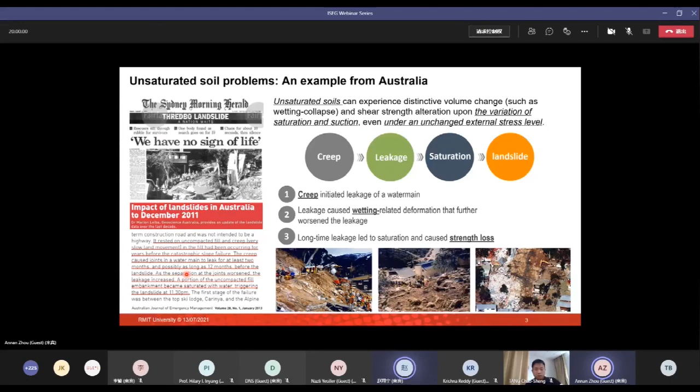Like the Thredbo landslide, unsaturated soil is blamed for many geotechnical and geoenvironmental damages and failures, like cracking in pavements, building tilting, damage of retaining walls, failure of GCL systems, and a huge number of slope failures. As we know, the main focus of soil mechanics in the last century was on saturated soil.

Most of the soil mechanical principles were developed for saturated soil as well. However, the variation of soil moisture due to environment and human activities is actually inevitable, and most shallow foundations and buried infrastructure systems are in the unsaturated zone. So they are impacted by soil movement and stress change related to wetting and drying.

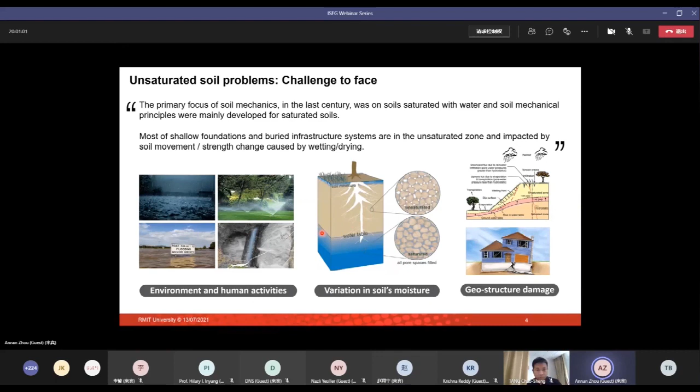So our research is focusing on unsaturated soil behavior at different scales. This presentation will cover 3 parts. In part 1, we will talk about constitutive modeling at the soil element level, which is regarded as the fundamental of unsaturated soil mechanics. In part 2, we will scale up to the engineering level and cover some aspects of numerical modeling.

For example, the footing behavior with a leaking pipe. And in part 3, we will scale down to the particles, where we will talk about micromechanical modeling of unsaturated soil at the particle level.

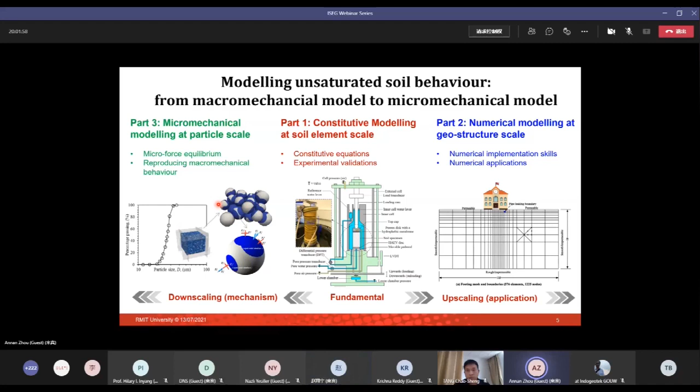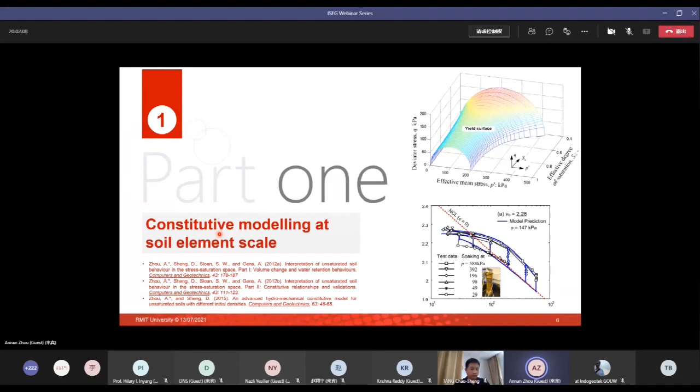Now let's start with part 1, the constitutive modeling at soil element level. Following the pioneering work done by Alonso and his colleagues in 1990, it is very popular to employ suction as a second constitutive variable in addition to the net stress or effective stress.

In general, these models assume the compression modulus, lambda S, of unsaturated soil as a function of suction. So compression modulus is usually involved in the hardening law for most of the elastoplasticity models. Therefore, these models can be classified as a category called suction hardening models.

We acknowledge different models may use different assumptions. We can see here two most popular options. For example, some models adopt compression modulus increasing with suction, but others adopt just the opposite, decreasing with suction. As long as suction is employed as a second constitutive variable and controls the hardening process, these can be viewed as still within the stress-suction framework.

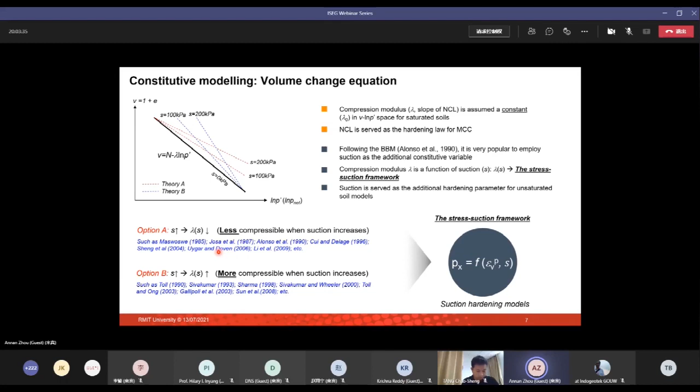The stress-suction framework, or the suction hardening models, achieved great success in unsaturated soil modeling, in particular in interpreting and modeling loading collapse behavior, but they still have some limitations. For example, in general they have the common problem in modeling a nonlinear compression curve at constant suctions and nonlinear collapse volume change at constant suctions.

So no matter either option A or option B you adopt, these two limitations exist. So we believe that suction, in the end, is a stress variable which may not be suitable to be served as a state variable as well.

Therefore, we assume the hardening of unsaturated soil is more related to the degree of saturation, or let's say the effective degree of saturation, which is a function of degree of saturation, SE. So we assume the compression modulus is a function of effective degree of saturation rather than suction.

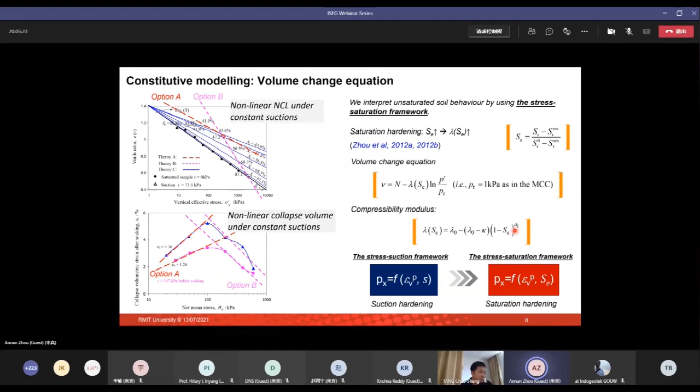So if we calculate the full derivative of the volume change equation, we can see the degree of saturation affects the volume change in two aspects. On one hand, SE affects the volume change by changing the compression modulus, and on the other hand, SE affects the volume change by changing the bonding capacity of the meniscus.

Here is the experimental validation of the volume change equation we propose. At constant suctions of 100, 200, and 300 kilopascal, we can mimic the nonlinear compression curve using the proposed model. This figure shows the comparison between the predicted specific volume and measured specific volume, which matches very well.

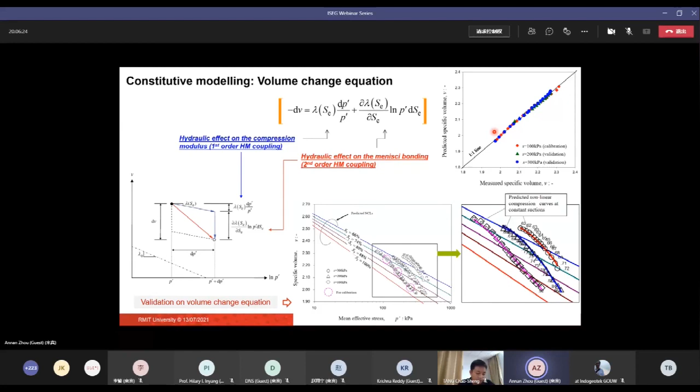If we look into this volume change equation again, we can find the effective degree of saturation, SE, plays a very important role. First, it constructs the Bishop's effective stress, so it is a component of the Bishop's effective stress. It also serves as a state variable, and it is adopted as a hardening parameter as well.

However, the effective degree of saturation itself is not a directly controllable variable. It is challenging to determine it from controllable variables like suction or net stress. To solve this problem, we proposed an enhanced water retention equation which can consider nonlinear hysteresis for cyclical drying and wetting.

Considering the nonlinear hysteresis, we involve a new parameter B here, which is related to the liquid-solid contact angle. This enhanced water retention equation can also consider the mechanical shift of the water retention curve at constant suction. To consider the mechanical shift, we introduce the second coupling parameter A2, which is able to couple the mechanical component volume change, volumetric strain, with the degree of saturation.

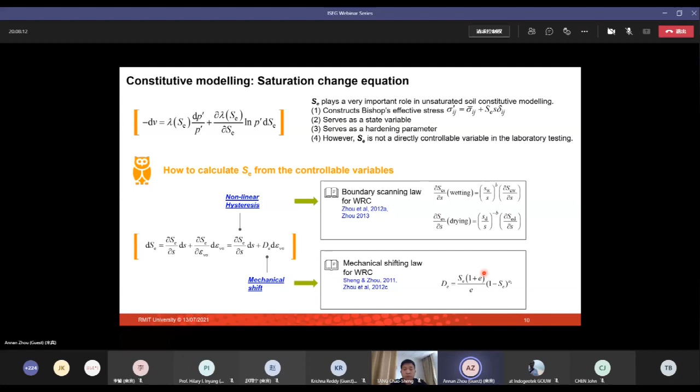Due to the time limit, I'll skip all the details about this enhancement and just show you the modeling results. These top two figures show the scanning drying and scanning wetting data and the modeled results, and the bottom two show the cyclical drying, wetting, and the prediction.

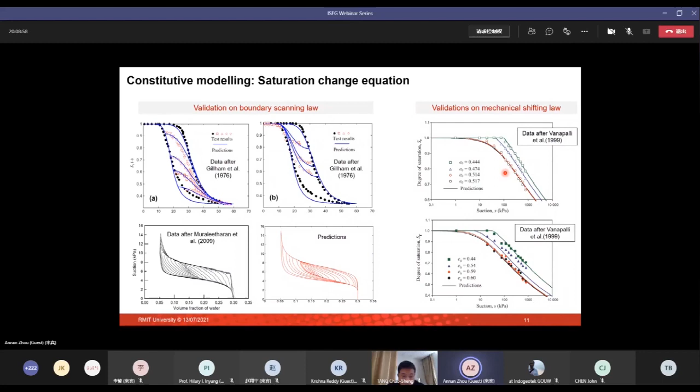We can see the comparison shows the model is able to mimic the nonlinear hysteresis of the water retention curve. The right two figures show the observed mechanical shift of the water retention curve and our prediction. We can see that with the decrease of the void ratio, the water retention curve is shifting upwards, and the prediction matches the experimental results very well.

Once we have the volume change equation and the saturation change equation, we can build up the full constitutive model following the modified Cam-Clay model or the Barcelona Basic Model. So we can derive the loading collapse surface, the yield surface for the unsaturated soil. This figure shows the yield surface for the unsaturated soil.

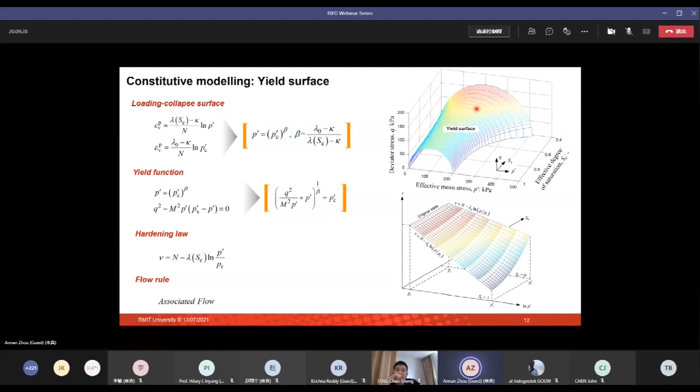This table shows the parameters we use for the constitutive model. We need 5 mechanical parameters, which are the same as MCC, and 5 hydraulic parameters like the Van Genuchten water retention curve, and 2 newly added coupling parameters, A1 and A2. A1 and A2 can be easily calibrated by one constant suction compression test like this.

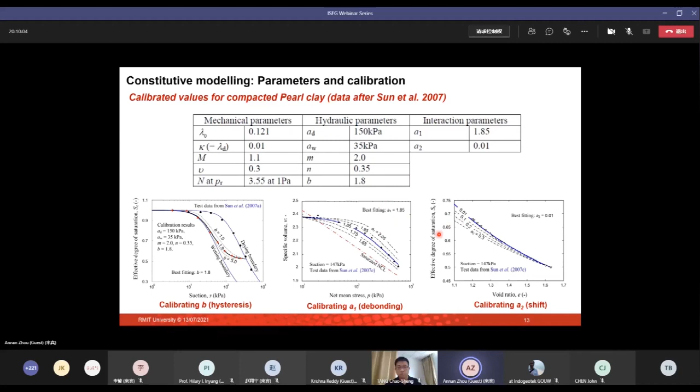Now let's see the model's capacity. These 4 figures show about 20 isotropic loading and soaking tests at different initial density and soaking pressure. The blue curves are model predictions, and the predictions and experimental results match each other very well, including the collapse segments. We can see here several collapse segments.

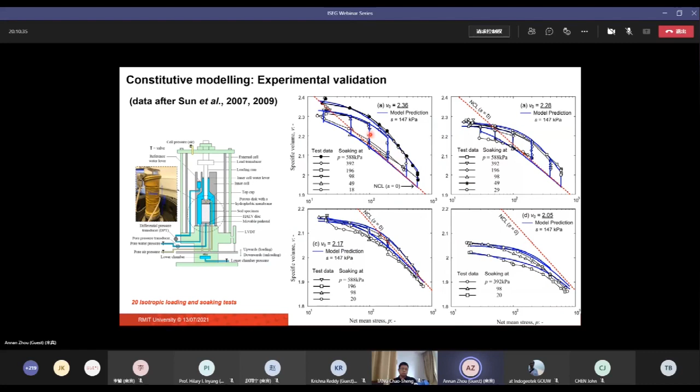These slides show 4 constant triaxial compression tests and predictions. For each test, suction and the degree of saturation are different. The top figures show the stress-strain relationship, the middle ones show the volume change, and the bottom one shows the saturation change. Again, we can see the model performs very well here.

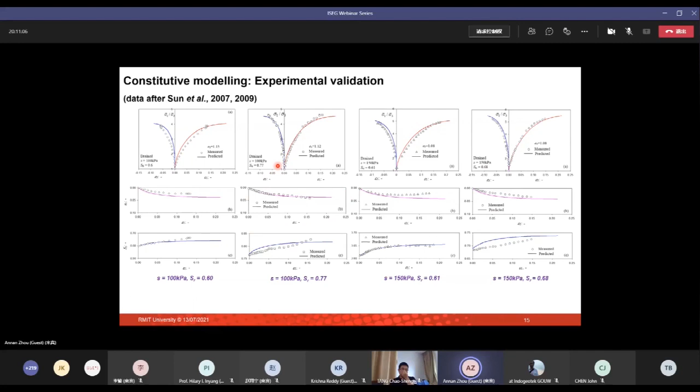As we mentioned previously, in part 2 we will scale up to the engineering level. In this part we will cover some aspects in numerical modeling of unsaturated soil problems, for example, the footing behavior with a leaking pipe.

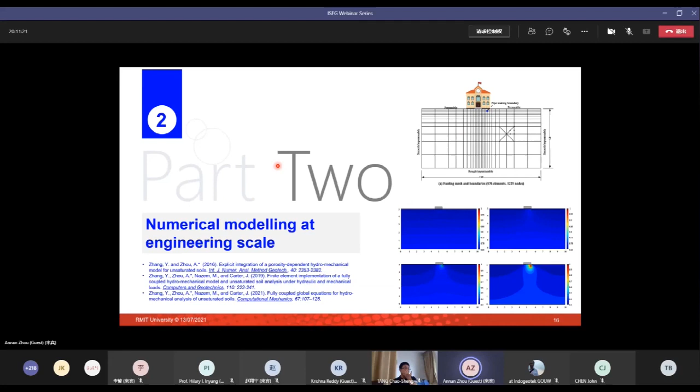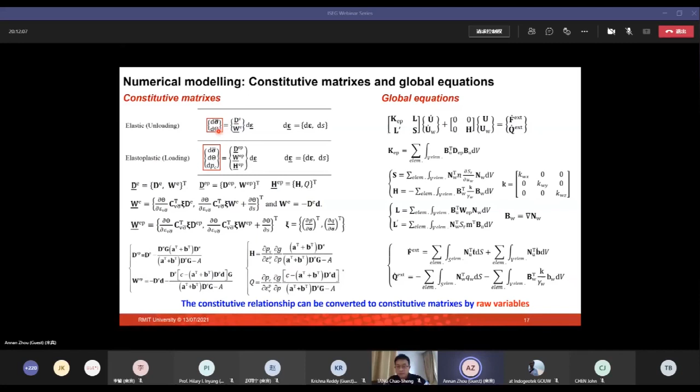Following the general way to build up the finite element program, we turn the proposed constitutive model into the constitutive matrix. One point I'd like to highlight here is, although we build up our model in terms of the Bishop's effective stress and the effective degree of saturation, the constitutive matrix for the elastic and elastoplastic responses can be finally represented using raw variables like total stress, strain, water content, and suction.

We use explicit integration for our model implementation. To ensure accuracy, we also involve the degree of saturation into explicit integration with automatic substepping control. We use this as a numerical example: a 20 increment with 734 automatic substeps.

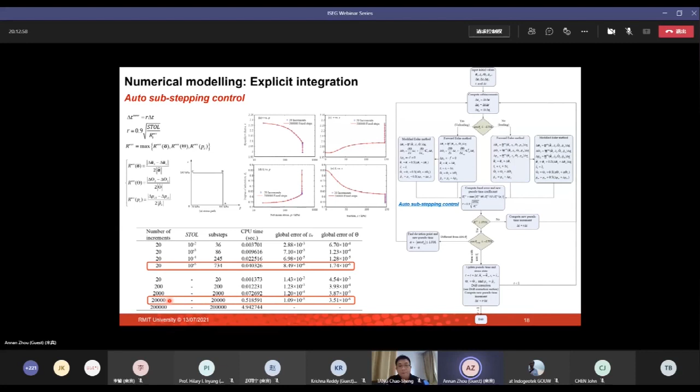This slide shows some validation examples for our finite element code. The left figure shows the sand column test result, and our prediction. Figure A shows the section control, the suction distribution change along with the depth with the time. Figure B shows the isotropic loading and wetting test result, showing the outflow rate with time.

This figure shows the isotropic loading and wetting test results and our simulations. The good performance confirms the capacity of the constitutive model as well as the numerical implementation methods.

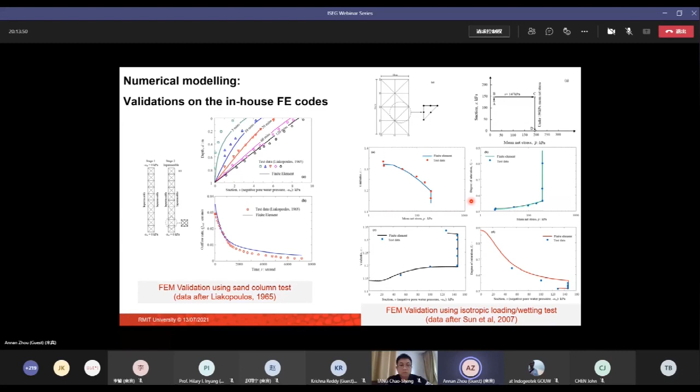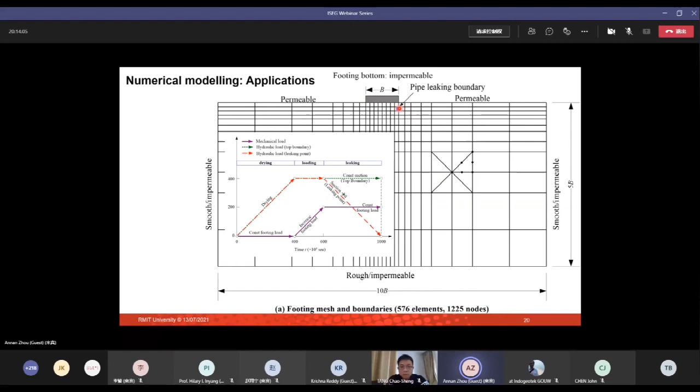This is a numerical example showing the footing performance with a leaking pipe. We can see this is a footing and this is a pipe with leakage. This figure shows the simulated suction profile change in the soil due to the pipe leaking.

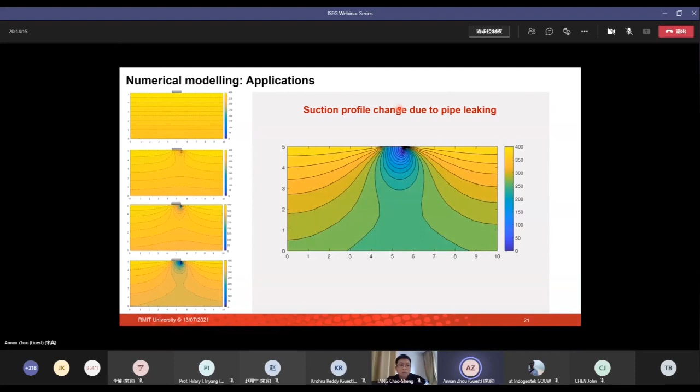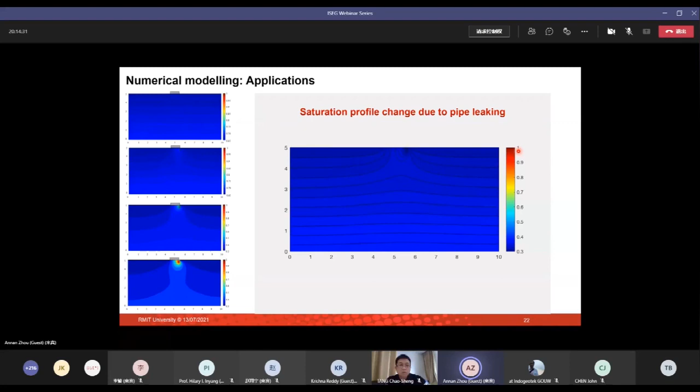This figure shows the simulated saturation profile change in the soil due to pipe leaking. We can see for the leaking point, the degree of saturation reaches 100% along with time.

This figure shows the simulated settlement of the footing due to the pipe leaking. We can see the curve here. For the near end to the leaking point, we observe wetting collapse. But for the far end of the footing, we observe swelling of the ground.

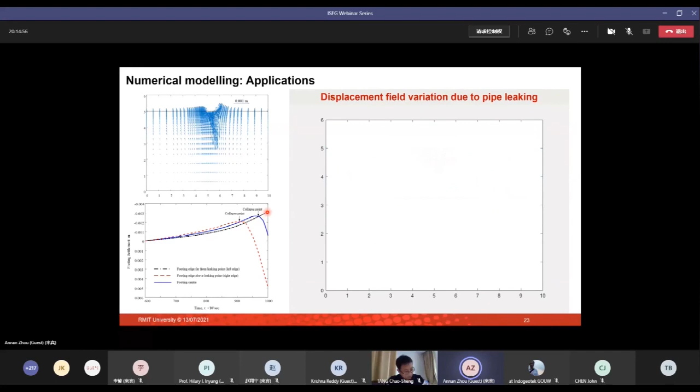Now let's move to part 3. In this part, we will scale down to the particles in unsaturated soil, and we will talk about the micromechanical modeling of unsaturated soil at particle scale.

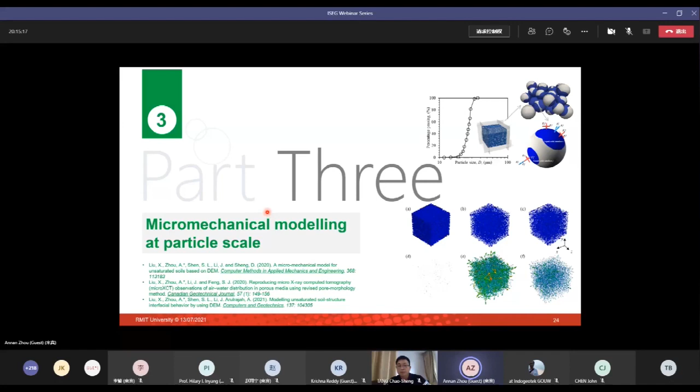It is clear that the micro forces acting on the particle caused by water are highly related to the liquid-solid interface. So therefore, the first step for the micromechanical modeling of unsaturated soil is to have a quick liquid-solid interface estimation that can be embedded into DEM.

We employ a simple method for quick liquid-solid interface estimation. For the overlapped caps, or clustered interface, we use the hemisphere approximation, which is a simplified Young-Laplace equation. For the isolated caps, we directly apply the Young-Laplace equation.

To achieve this, we also developed a simple way to judge the interface, which should be classified as overlapped caps and which should be classified as isolated caps. So like this.

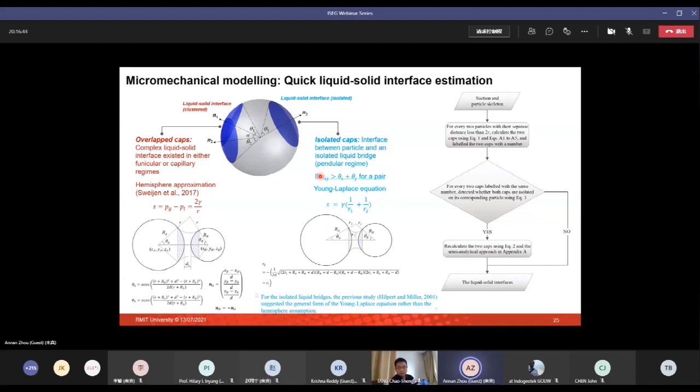Using 22 particles, we compare the simulated interface obtained by our quick estimation method and the pore morphology method for different suctions. The performance is not bad, but more importantly, the quick estimation method is much faster than the traditional pore morphology method, giving us the opportunity to include it in the DEM simulation.

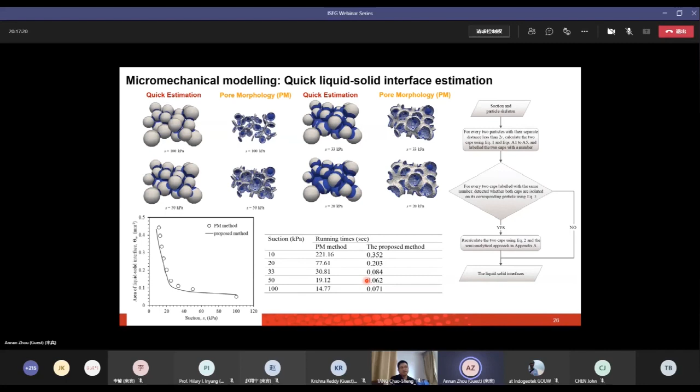Once we determine the liquid-solid interface for a particle, we are able to calculate the capillary forces. The capillary forces consist of two parts: the force determined by the liquid pressure Fs, and the force determined by the interfacial tension F gamma.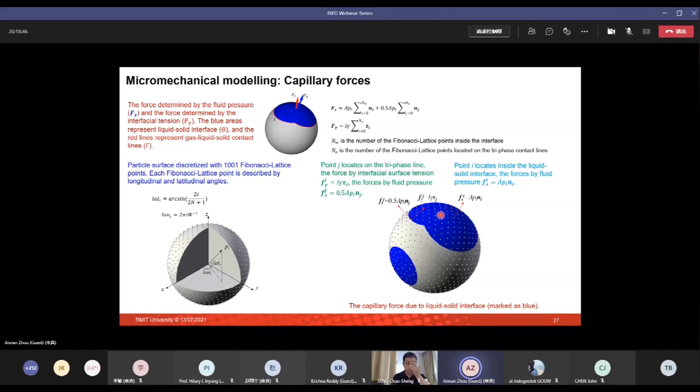So the total force acting on a particle consists of the contact normal force Fn, contact shear force F tau, liquid pressure force Fs, and the tensile force at the solid-gas-liquid line F gamma. Once we identify the total force for each particle, we can make use of the commercial DEM solver to find the equilibrium.

For each step of the equilibrium, we need to update the liquid-solid interface and the related forces. Even with the quick estimation method we proposed, it is still a very time-consuming process for this kind of simulation. So let's see the results.

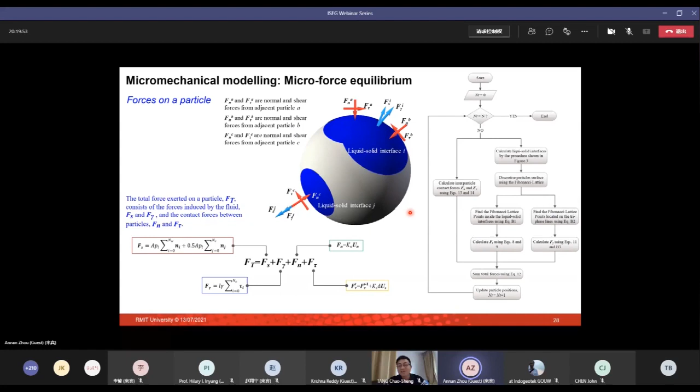We use a micromechanical model to simulate several desaturation tests and constant suction triaxial tests with different confining stress and different suctions. We used 9,977 particles for the simulation, with particle sizes ranging from 11.7 micrometers to 34.5 micrometers, in the range of silt.

We also calculate the effective stress parameter chi from our micromechanical model, which shows good match with the experimental results, better than the existing research from other pioneers. This comparison shows the capacity of our micromechanical model.

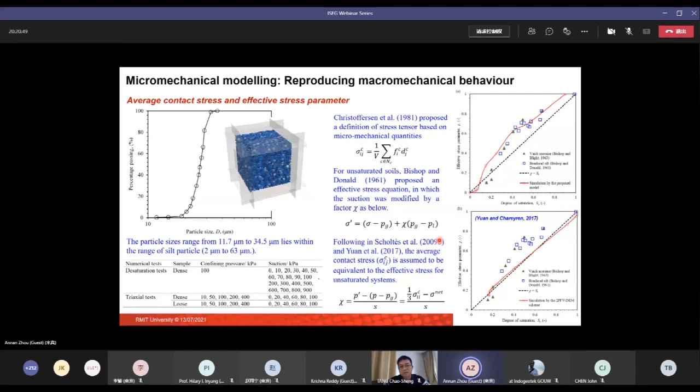So this figure shows the macroscopic stress-strain relation behavior produced by the micromechanical model for the loose and dense sample with different confining stress and suction. We can see the dense sample shows peak strength more distinct compared with the loose sample, and the sample with high confining stress shows a high strength.

More importantly, we can find the sample with 40 kilopascal suction shows the highest strength for all the groups. This is because at 40 kilopascal suction, the product of suction and the effective degree of saturation is the highest.

So we pick up the strengths, including the critical strengths and peak strengths for each stress-strain curve, and plot them together in the space of Q and average contact stress. They show very good linearity, which indicates the average contact stress may be a good option for building up the constitutive model.

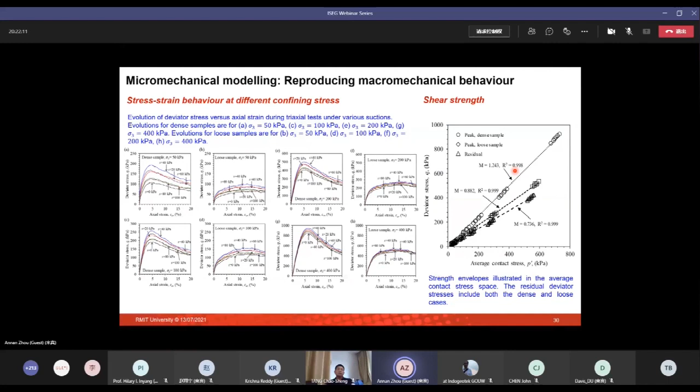This figure shows the liquid-solid interface distribution, capillary force distribution, and angular distribution during the shearing. The axial strain for this figure is 0, 2% which is the peak strength, and 20% which is the critical state. We can observe the capillary forces turn from isotropic distribution to anisotropic distribution during shearing.

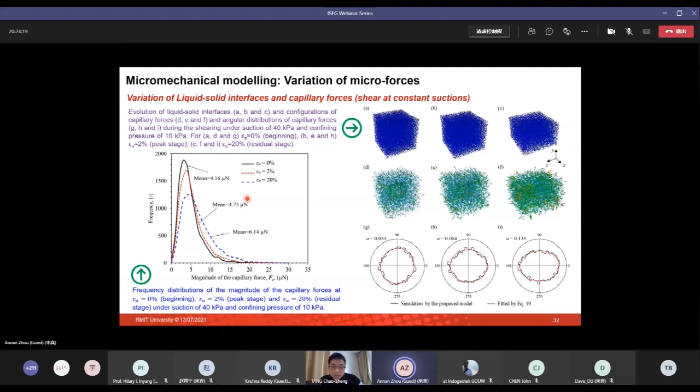This figure shows the variation of the contact force network for 0 suction. This is for 0 suction, and this is for 40 kilopascal suction. We can see the contact force.

You have 2 minutes. Yeah, that will be enough. This is the last slide.

We can see the contact force network at 40 kilopascal is much stronger than that at 0 suction. From the frequency and mean value plot, we can also identify that at the entire shearing stage, the mean contact force with 40 kilopascal suction is much higher than the mean contact force at the 0 suction. That's why we observe the stress-strain curve of 40 kilopascal suction is much higher than the others.

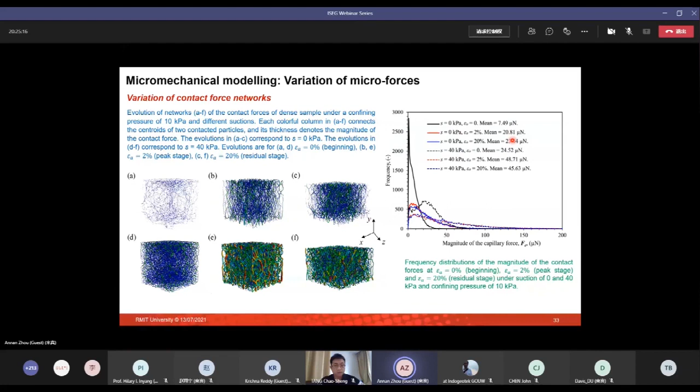Now let's move to some concluding remarks. Let's make it simple. First, the Bishop effective stress and the effective degree of saturation are adopted as the basic constitutive variables, and the hydraulic hysteresis and fully coupled hydromechanical interaction can be considered.

The current model is more suitable for silty soil. It is still very challenging to model clayey soil over a large suction range, and this framework cannot be used for unsaturated expansive soil either.

The constitutive model has been implemented into the finite element codes. The developed in-house finite element codes can be used for 1D, for example the soil column, and 2D, let's say the footing analysis.

But the current finite element approach is still hard to be applied to real case analysis, for example 3D multi-soil layers and natural environment conditions.

The micromechanical model has been built to bridge the micromechanical characteristics and the macromechanical observations. But due to a few assumptions, the comparison between the results from the micromechanical model and the macromechanical observation still remains a mechanism issue, so it is still hard to compare the results directly with the unsaturated soil test results.

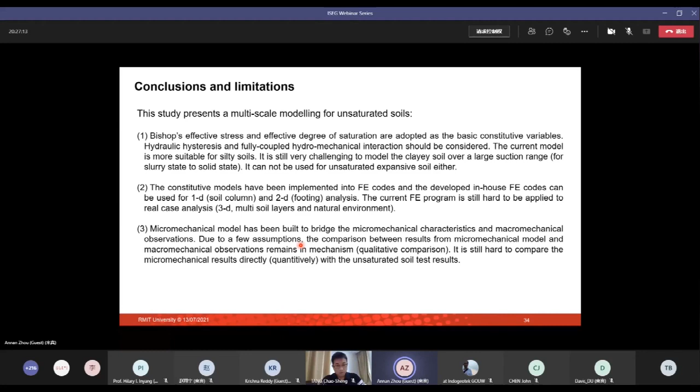All in all, in unsaturated soil research, we still have a long way to go.